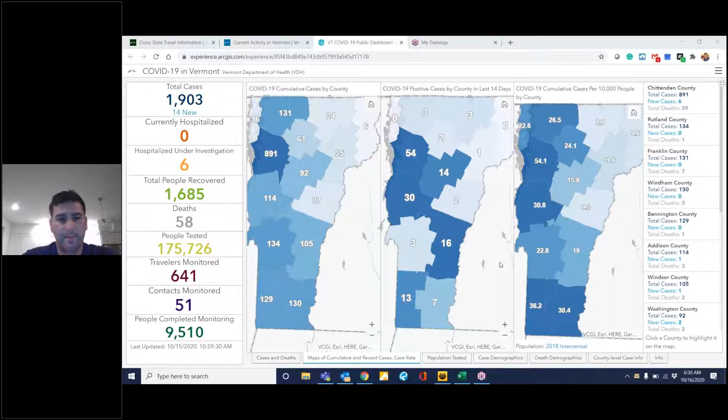This week there's a little uptick in COVID active cases here in Vermont. Yesterday had 14 new cases. The regions of Chittenden County and Addison County are definitely the two most prevalent in our area in the last 14 days. The bar chart shows that since that little outbreak in Shoreham, we've been averaging anywhere from 8 to 11 cases a day currently.

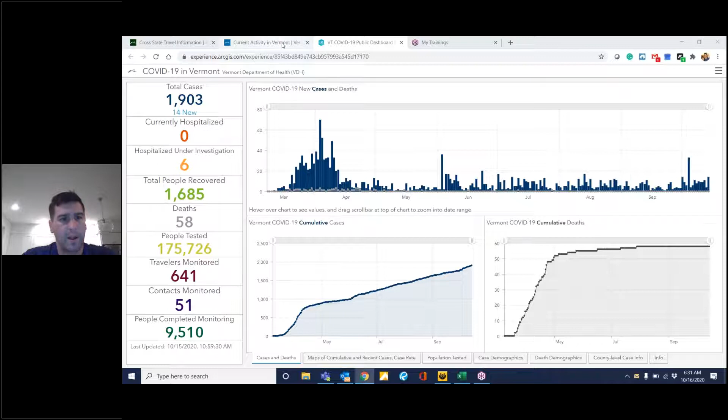The updated map for our leisurely travel shows a couple new counties in New Hampshire that have popped up this week, and definitely in the Adirondacks as well for us. So again, just keep up the good communication, anything COVID related, contact myself or Alberta, and we are here to assist you in any way we can.

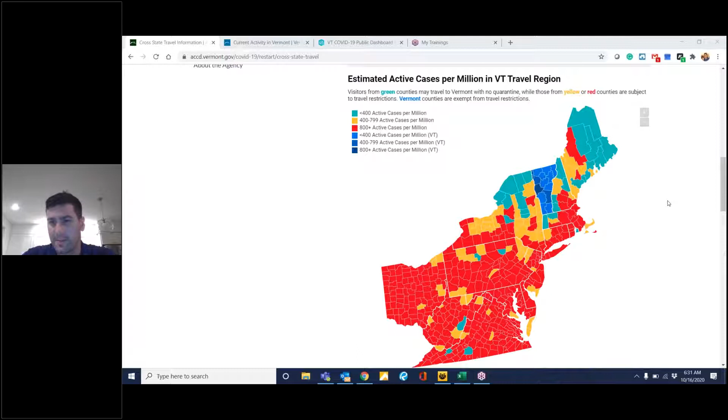Can you see my screen, Matt? Yes, we can.

Good morning, everyone. This week's code of conduct is be prompt: start on time for work, appointments, projects, etc.

Safety news for this week: we are at 73 days without a recordable injury.

This week's topic is the influenza, the flu, for the 2020-2021 season. Today is our flu clinic, so everyone please show up if you're going to get a flu shot today. We are here from 8 to 10. We have moved over to the surveyor's building due to the rain out here, to keep everyone dry. Everyone is encouraged to get a flu shot today.

Getting vaccinated is more important this flu season than ever. Vaccinations will help keep people out of the hospital from being overwhelmed by the flu, so that resources can be focused on taking care of people with COVID-19.

The CDC recommends everyone 6 months of age or older get vaccinated every flu season. It takes about 2 weeks for the protection to develop after vaccination.

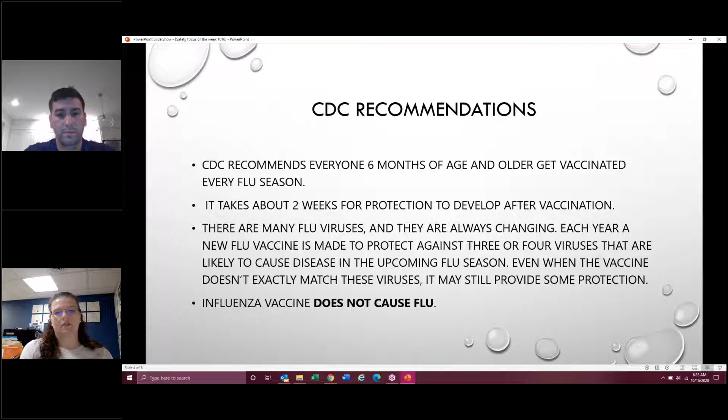Boost your immune system. It's that time of year with colds and sniffles, and not much sunshine or warm weather, so taking a multivitamin is extra help. Drink plenty of water, eat a variety of fruits and veggies, and get quality sleep, 6 or more hours a night.

Get some liquid sunshine—take a vitamin D supplement. Stay active, lift weights, take 30-minute walks a day, and get at least 10,000 steps in.

And then lather up. Wash your hands often with soap and water. If soap and water aren't available, use an alcohol-based hand sanitizer, which we do have available in the tool crib.

A casual runny nose is hard to judge this time of year with seasonal allergies—after 72 hours if symptoms worsen, stay home. For vomiting, diarrhea, or ongoing upset stomach, you can return to work 24 hours after these symptoms are gone.

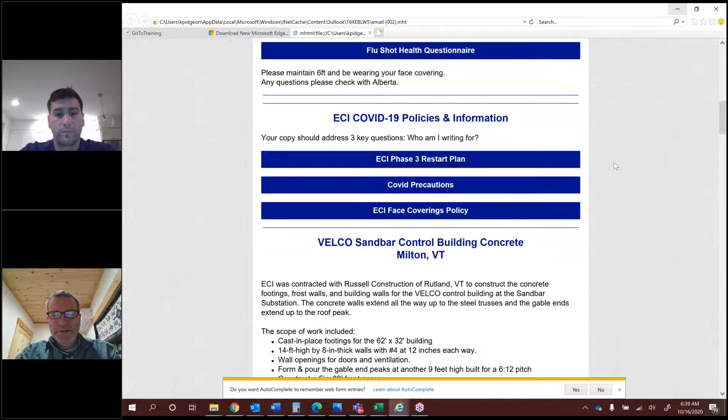For the project of the week, we're profiling the VELCO Sandbar Control Building Concrete in Milton. We're contracted with Russell Construction of Rutland, Vermont, to construct the concrete footings, frost walls, and building walls for the VELCO Control Building at the Sandbar substation. The concrete walls extend all the way up to the steel trusses, and the gable ends extend up to the roof peak—quite an unusual building, since the concrete work doesn't end at the slab and frost walls.

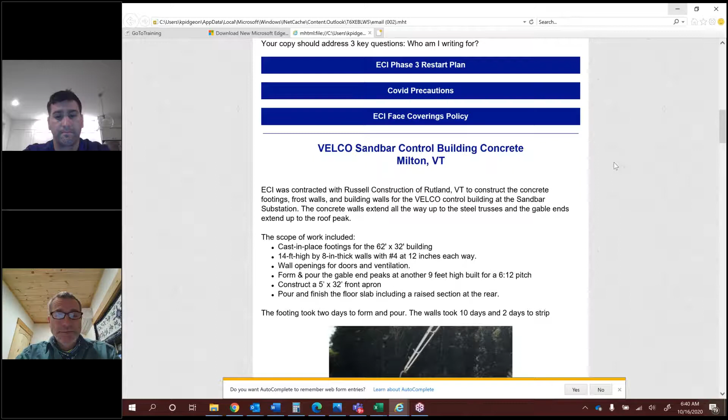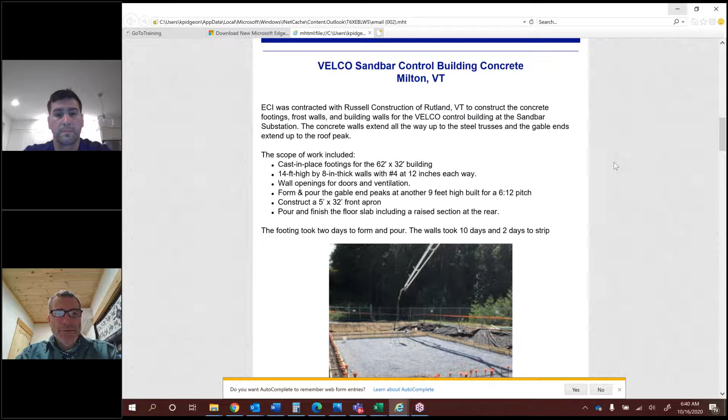The scope of work included cast-in-place footings for a 62 by 32 foot building, with 14-foot high walls off these footings, 8 inches thick, number 4 rebar at 12 inches each way. Wall openings were built in for doors and ventilation. We also formed and poured the gable end peaks another 9 feet above the 14-foot wall to form a 6:12 pitch. We constructed a 5 by 32 foot front apron, and poured and finished the floor slab, including a raised section at the rear.

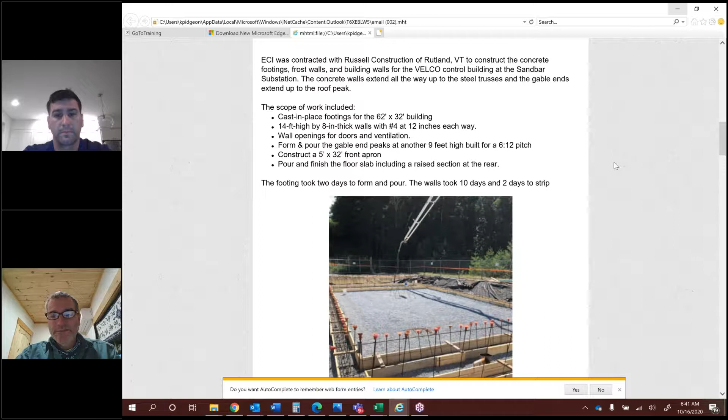The footing took just 2 days to form and pour, and the walls took 10 days plus 2 days to strip. Here's one of the first days, starting to pour the footings.

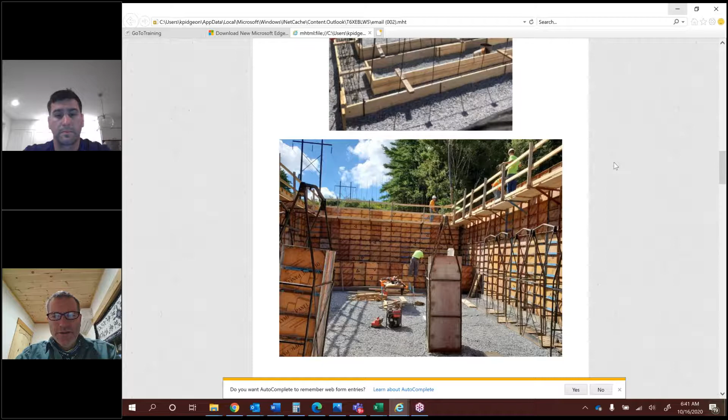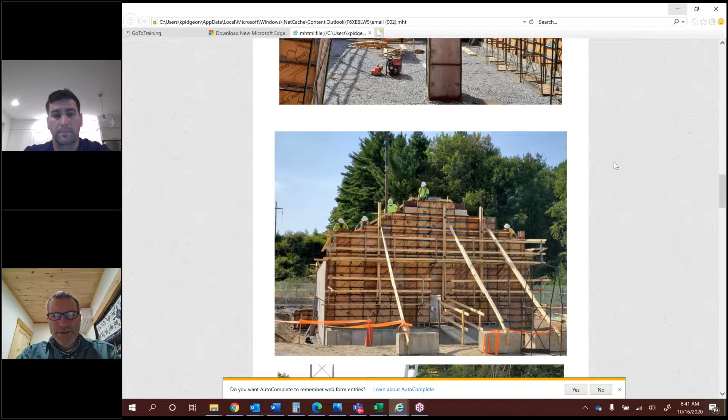You can see the pretty impressive 14-foot high walls all around, quite a little box that they formed. And here's the gable end—it's rather unusual to bring the concrete right up to the peak of the roof.

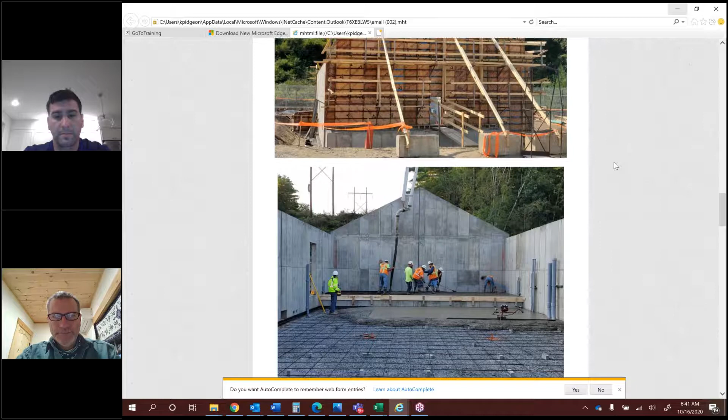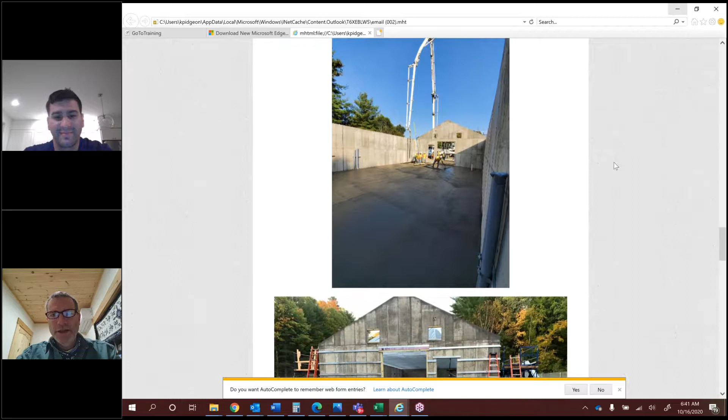Here's pouring the raised section of floor at the far end, and this is completing it—looks like they got themselves boxed into the corner there. You can see the overhead door opening, the man door openings, and the ventilation openings up on the gable end, with a view from the outside.

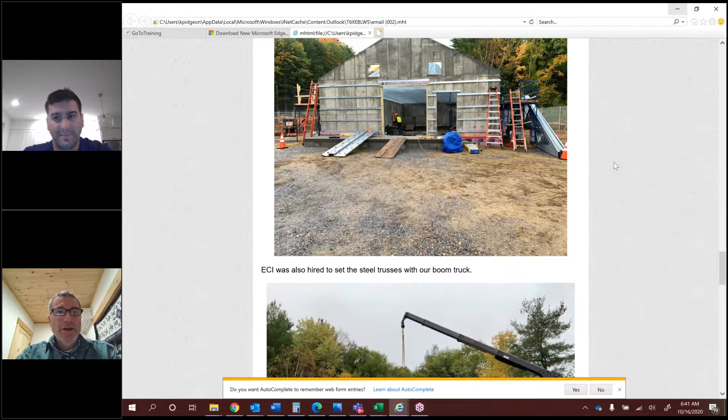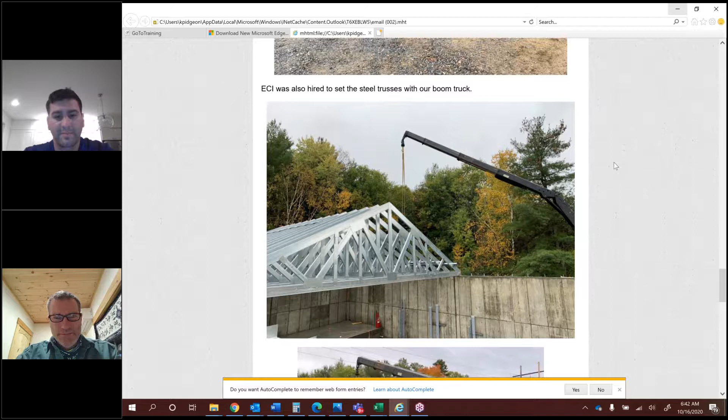We were also hired to set the steel trusses with our boom truck. Pretty cool looking—I'd never seen steel trusses like that, shaped like a steel 2x4 or 2x6. We were just doing the setting with the crane.

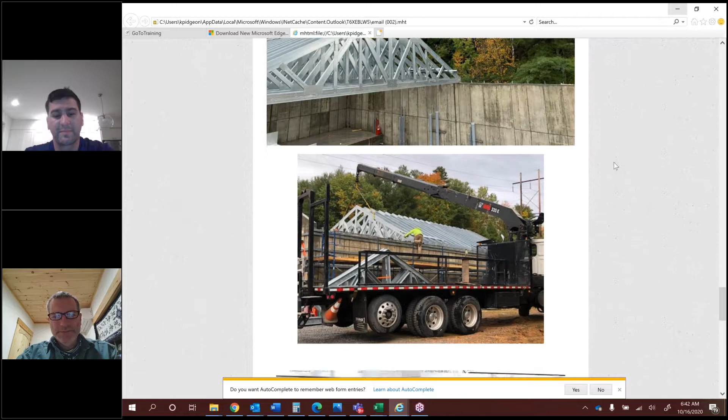That's one of the Russell Construction guys setting it into place, and here, after those trusses were set, you can see inside of the building. Pretty neat.

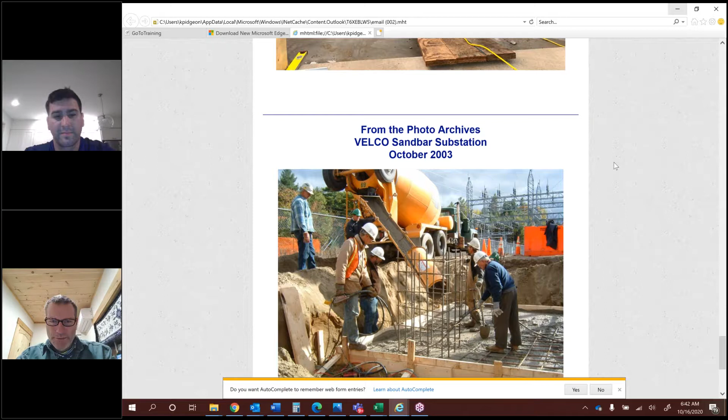For the photo archives, I also have an old picture from 2003 of the VELCO Sandbar substation, pouring a footing here for some of the equipment. You can see that's the old SD Griswold days, because they're doing the pour with the old yellow and green trucks. And that's what we've got.